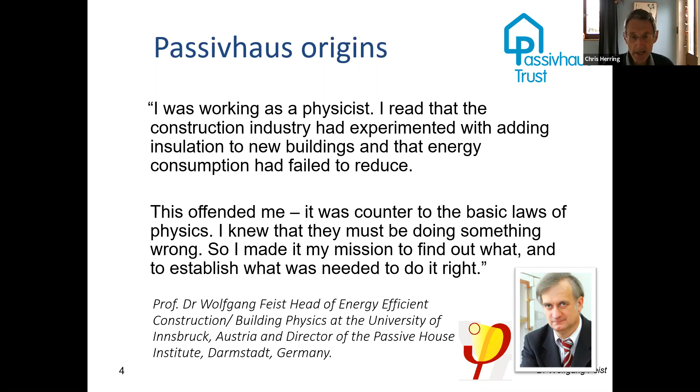And as a result, a group, Wolfgang and colleagues, developed this row of experimental houses just outside Frankfurt in a small town called Darmstadt. They got some local state funding to do this experimental work, and it was very experimental. It was based on very good building physics and on a scientific understanding of comfort, and we'll be talking about comfort a lot more during this session.

But it was experimental in the sense that if we build a passive house now, we've got a supply chain, we've got the products we need, then they had nothing that they needed. So they had to develop their own window ranges, their own ventilation systems. So extraordinarily experimental. What they found is that what they did worked. It's still working. It's been monitored extensively. There are 4 units here, and Wolfgang and his wife Witta live in one of them.

They recently did quite an extensive monitoring of the building and checking the wall structure and things like that to see if it was all working correctly and was still sound and everything was as they expected. So this was a success story, and out of this has grown the development of the passive house standard and methodology that we know today.

Now, that story about things not performing as expected that started Wolfgang off on this whole journey, if you like, is one that's repeated here in the UK. This is a piece of work done by Leeds Beckett University, which is quite near to me. I live in West Yorkshire. And the Centre for the Built Environment there have done a lot of work monitoring low energy buildings. They actually do what's called a co-heating test, where they physically test the building. They heat it up and check its thermal transmission.

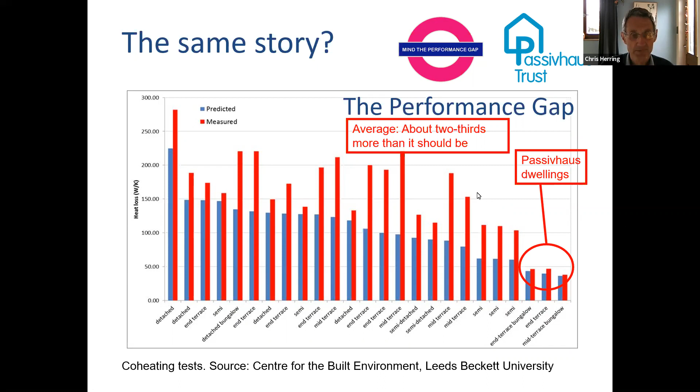So what is it? Well, it's basically an energy efficient building, a building that requires very little heat to maintain comfort within the building. And most of that heat will come from our own bodies, our household appliances, heat from the ventilation air that we recover, and some from the sun, not too much, otherwise we overheat. And there is a technical definition of the threshold of the amount of heat, but to put it simply, that's a very small amount of heat.

We do need heat in a passive house. It's not a zero energy building. That becomes disproportionately expensive to do. This is a sweet point where it requires a very small amount of energy, and it's a very cost-effective thing to do.

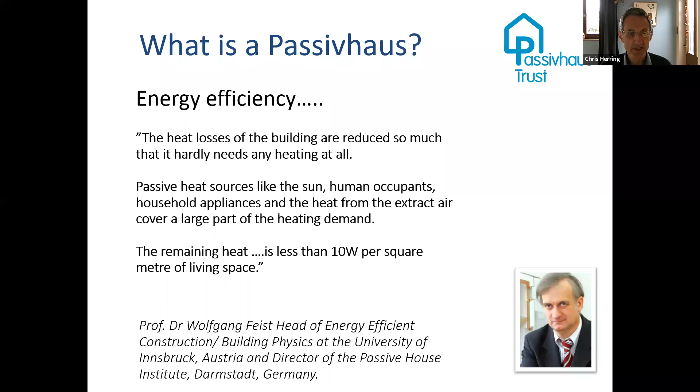But it's also about comfort, because when Wolfgang's colleagues were looking at the science, the building physics, they were also looking at all the research that has been done on how we make buildings comfortable. And the key feature of passive houses is that they're also very comfortable and very healthy. And I'm going to talk a bit more about that in a moment.

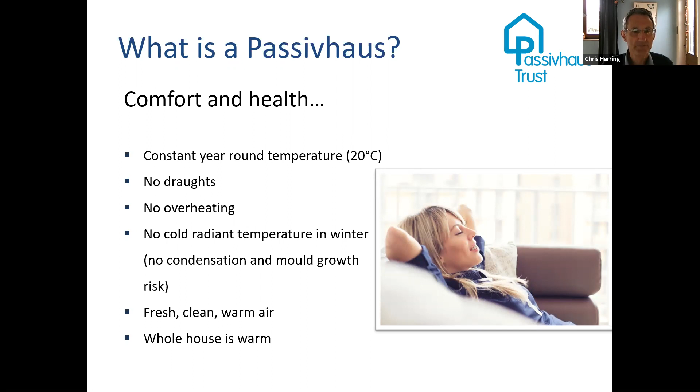There is a lot of science behind this, but you don't really need to know a lot of the science in order to be involved with passive house or even to be building passive house. We have a methodology that's supplied to us. We do need a certain understanding of building physics if we're actually a building professional, but there is a lot more behind this. The Passive House Institute is a scientific institute that supports this worldwide.

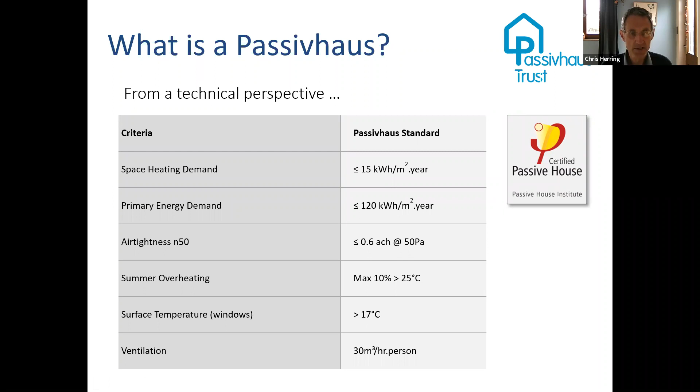So what have we got to do in principle? Well, it's kind of very simple. It's about very good building. It's about just building well, but also obviously we want to insulate, because we're not going to save energy and we're not going to make ourselves comfortable if we don't insulate. So high levels of insulation are obvious, but in with that, if we don't do other measures, then the insulation has little effect. So we need to get rid of our thermal bridges.

That means we need to particularly get rid of places where insulation thins down, or there's a reduction in insulation level, or where something goes through the insulation. And as we increase our insulation levels, those thermal bridges become proportionally much more significant. So we need to get rid of them, or if we can't get rid of them, we need to model them properly. If we're building insulated, we also need to build airtight. The two things go together.

If we imagine wearing a well-insulated jumper and you go out in the wind, it has very little effect. You need air tightness in conjunction with insulation, which is something that seems to be relatively poorly understood generally. We need our windows, which can be the weak point of the building, to be high performance. So in this climate zone, we'll need triple glazed windows. And then we need an effective ventilation system. And that would be mechanical ventilation with heat recovery. And I should be coming back to all of these more. So this is just an overview.

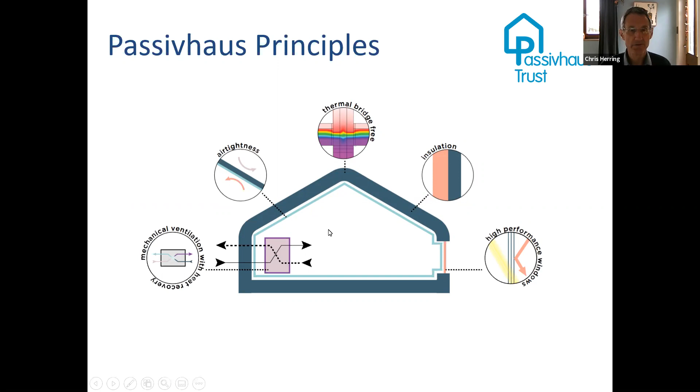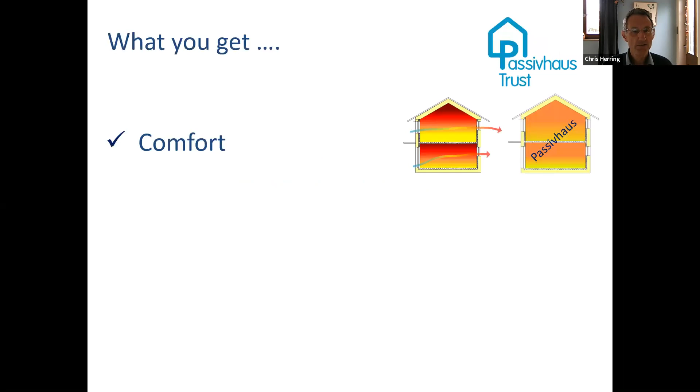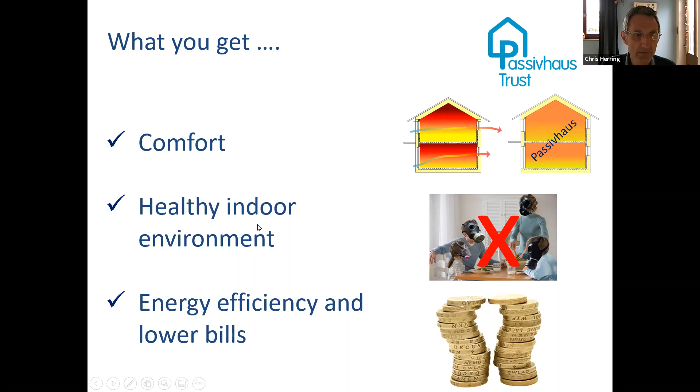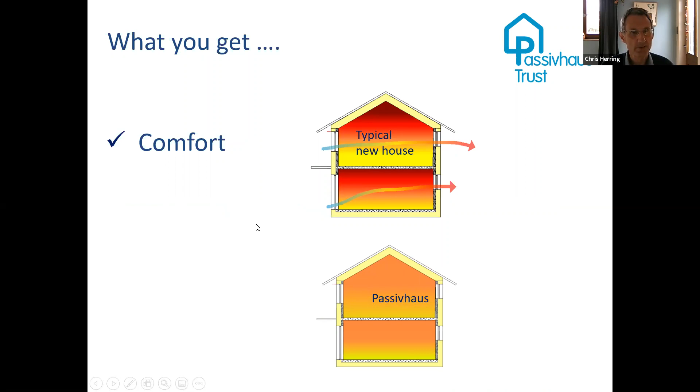Now, what do you get if you build to Passivhaus standard? What's the advantage for you of building to this standard if you decide to do it? So you get comfort, you get a healthy indoor environment, and you get energy efficiency, and of course lower bills. And we'll just unpick each of those and have a look a little bit more at what we mean and what the outcome is. So starting with comfort. Now, comfort, most people will say, well, my house is quite comfortable. I heat it in winter. What do you mean here? What does this comfort mean? Well, let's have a look at that.

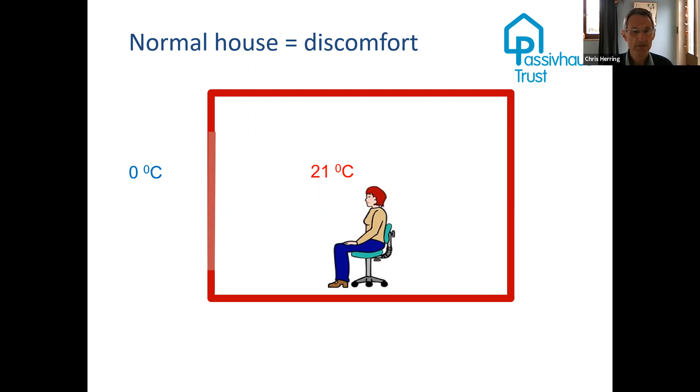So let's start and look at the sources of discomfort in conventional buildings. So the first thing we have in conventional buildings, including buildings built to the current building regulations, we have a lot of infiltration, a lot of drafts coming through the walls. Basically, we don't build very airtight, even in our new buildings, and of course our existing buildings are even worse. But a lot of air moving through the fabric of the building.

We'll generally have cold surfaces on our old buildings. Obviously, many of our walls are cold. Even in new buildings, our windows are likely to be fairly cold. They'll only be double glazed. So we've got cold surfaces radiating cold in effect towards us. And that affects our sense of comfort. If we've got cold surfaces, we will get cold downdrafts from that surface. The cold air will fall down, it will tend to cause a draft, and many of us will experience that as cold air moving around our feet. That increases our level of discomfort generally. Our feet are very sensitive to cold air movement.

And finally, we'll get ventilation drafts. So we're either ventilating in old buildings, probably just by allowing the air to move through the walls. In newer buildings, we put in trickle vents, holes in the windows to allow ventilation, and some extract fans in the kitchen and bathroom. That allows cold air to travel, and that cold air will be affecting you even if you're not aware of it.

So what do we do to then say, well, I'm comfortable? We increase the air temperature, and that will compensate. It does give us a level of comfort. It counteracts the discomfort of the fabric of the building, and that's what most of us mean when we say my house is fairly comfortable. But of course, the cost of that is much higher energy bills and much higher CO2 emissions.

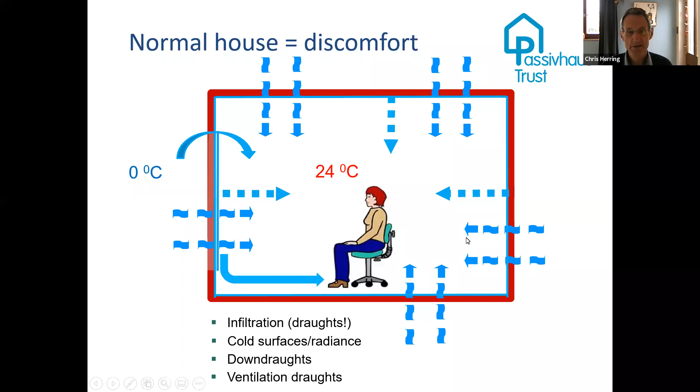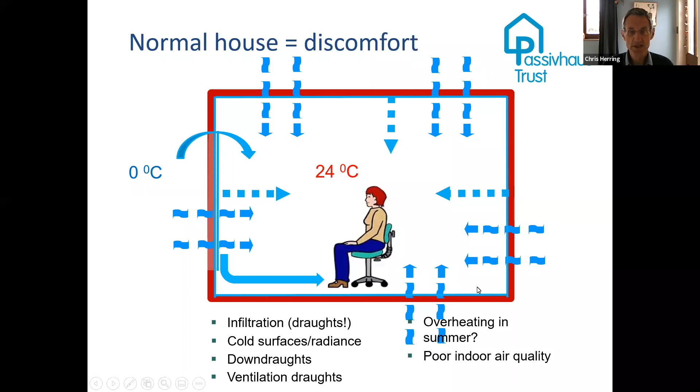The other things in terms of discomfort, slightly on the side, are that many newer buildings will overheat in summer and they'll be very uncomfortable. It's kind of an increasing phenomenon. And most modern buildings have quite poor indoor air quality. Older buildings tend to be better because they're so leaky that the air is moving through the fabric all the time.

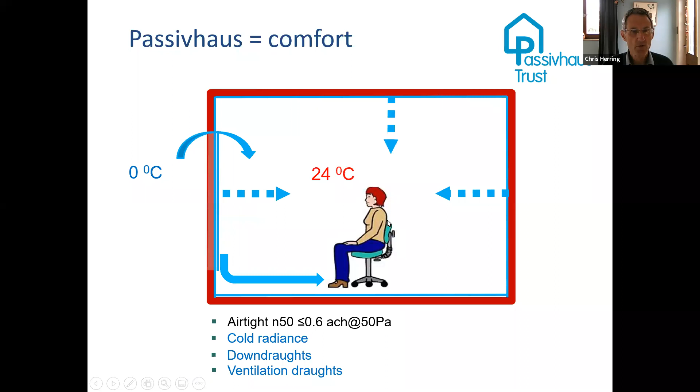So what do we do about that? How do we increase the comfort of the fabric of the building? Well, the first thing is get rid of all those drafts. So make the building really airtight. And there is some science behind this in terms of the level of airtightness, so that we don't experience any air movement through the fabric of the building and experience discomfort. Make sure that surfaces are warm. That means insulating properly to high levels all the way around, with no bridges, no bits where the insulation is broken.

We've got a cold bit. Make sure our windows are warm on the inside. So that means triple glazing in order to achieve a sufficiently high internal temperature. And then get rid of those ventilation drafts by pre-warming the air that comes in, which is what our mechanical ventilation with heat recovery does.

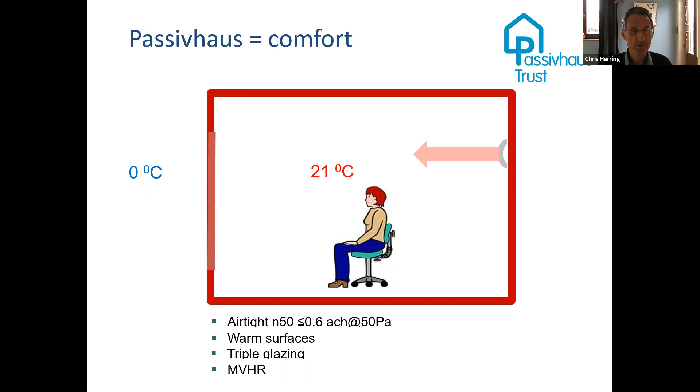That way we can then reduce our indoor air temperature and be comfortable, because the fabric of the building is actually inherently comfortable. In a passive house, we can also deal with the overheating, because we've got quite a good way of modeling the overheating as part of our methodology. And we end up with excellent indoor air quality, which I'm going to talk about in a moment. So we'll come to that.

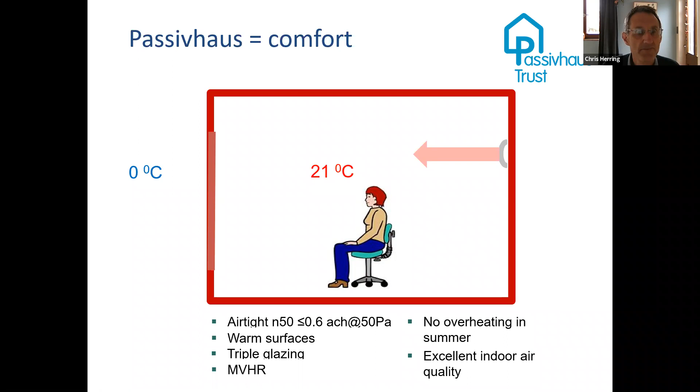So healthy indoor environment. This is the other thing you get. Now, if you talk to people who live in passive houses, they won't usually talk first about their energy bills. What they talk about is the comfort and the feeling of health, the feeling of a fresher indoor air quality. Very nice air quality, feeling very comfortable, no mold. They often talk about the quietness of living in a passive house, because it's very,

if air leakage can get into a building, the sound can get through the same gaps in effect. So an airtight building will be more acoustically insulated. Our windows are triple glazed, which improves that. We'll have no mold growth, because that's part of the methodology, showing that there is no mold growth.

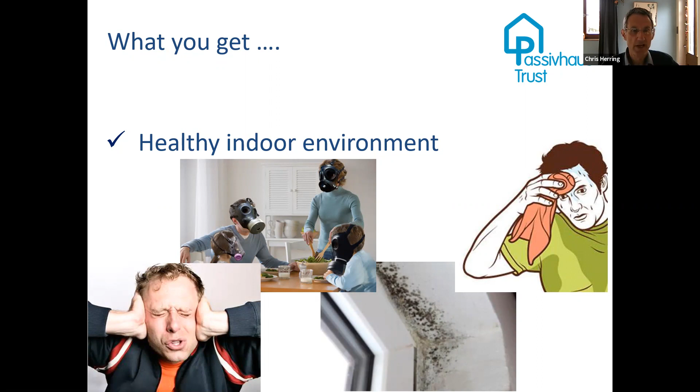We get very good indoor air quality, because our air is filtered as it's coming in. So we filter out pollens and particulates. And we'll have no summer overheating, or very limited summer overheating. So generally it's comfortable and healthy at all times. And as I say, this is what residents tend to talk about.

In terms of air quality, this is a complex subject, and there are many, many factors that lead to poor air quality, from volatile organic compounds from our furniture and carpets and paints, combustion products if we've got gas cooking or anything like that, mold growth, dust mites, etc. And all of those things need to be dealt with. They are dealt with in the building regulations in terms of ventilation levels, but it's not really very effective.

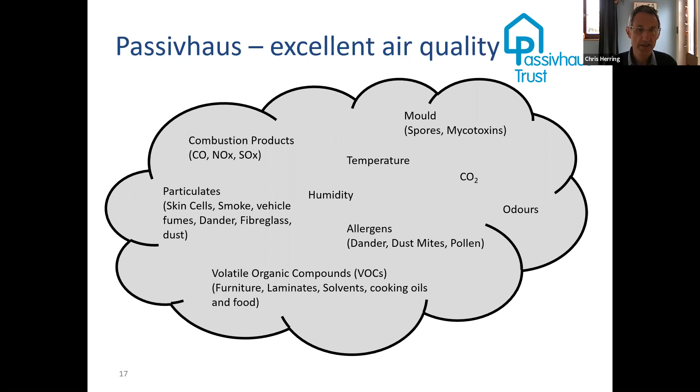Having very good ventilation deals with a lot of this. So with Passive House, we're optimally ventilating. Our mechanical ventilation is calculated carefully to give us optimal ventilation. What that also gives us is optimal humidity. And this is very important to our health, because generally most buildings in the UK are not too dry, they are too moist.

And my own house, which is an improved Victorian terrace house, in winter we're often at about 65% relative humidity, which is not terribly healthy. It begins to get towards a situation where we'll get more bacterial growth, dust mites are more likely to develop. There are a number of factors that mean that we're less healthy.

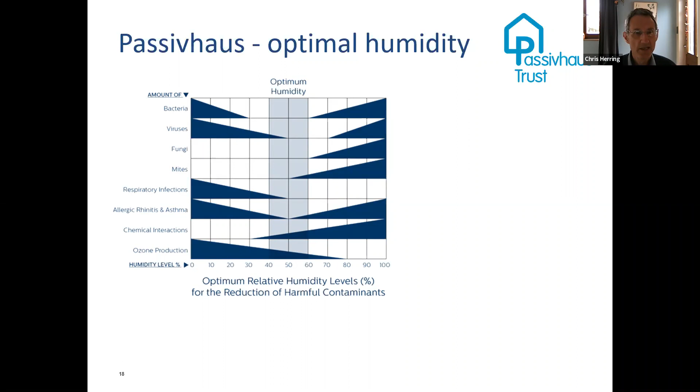The optimal humidity is in this band shown here, about 40 to 60%. And my own experience and the experience of most people is that in the UK with MVHR, we're typically running between 40 and 50%. So absolutely in that optimal band for humidity. And this is key. It's key in terms of mold growth, although we wouldn't expect mold growth in a passive house because every surface is warm. There's no way for the moisture to condense.

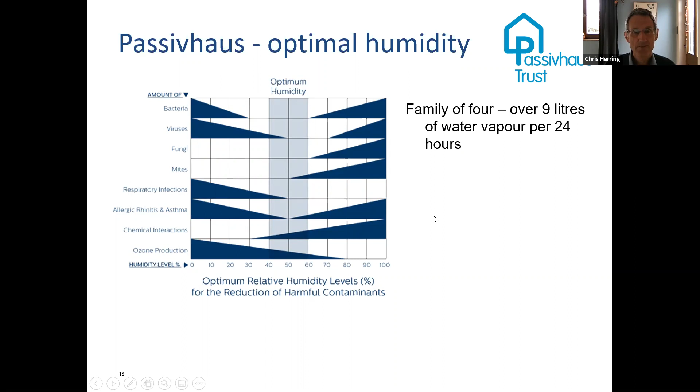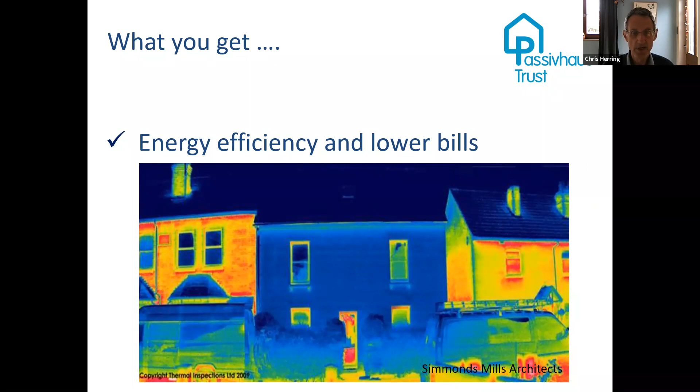So the passive house retrofit, built to the passive house standard, there is very little heat getting out, and therefore the walls are cold and showing blue, whereas the houses adjacent, there's a lot of heat leakage, and of course they're showing much warmer colours. So you can see the effect of building to this standard. And you do get much lower bills.

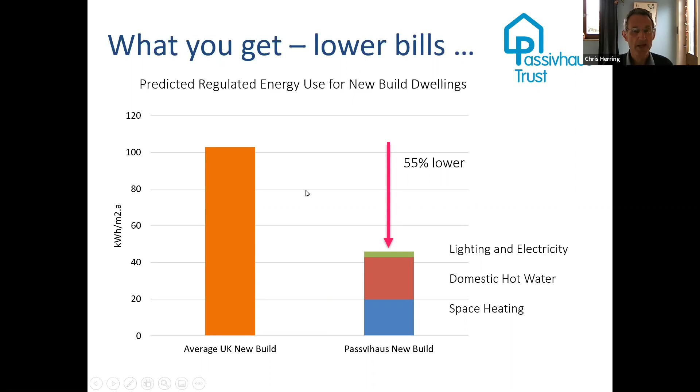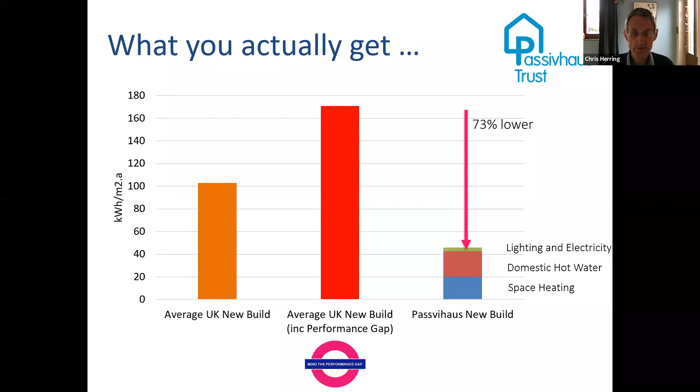However, if you remember the performance gap, theory and practice are not the same. And the reality, if you account for the performance gap with new build, is that we're around about 73, 75% lower in terms of our regulated energy use. So a massive saving. And residents of passive houses will talk about their very, very low energy bills.

So what do we have to do? What actually does this look like? And I'm going to start from the beginning. So I could start with the insulation, but actually I'm going to start with orientation and then form, because we need to start at the beginning of the process.

And the first thing when we're planning our building is just thinking about the orientation and being aware that a south-facing orientation is likely to be more efficient than a north-facing orientation, because obviously we're gaining some of that free energy from the sun. We don't want too much, otherwise we overheat. So that's something we calculate in our methodology, but it's important to be aware of, and it highlights that we need to start this process from the very beginning, from where we first conceive of our building, not bolt it on later.

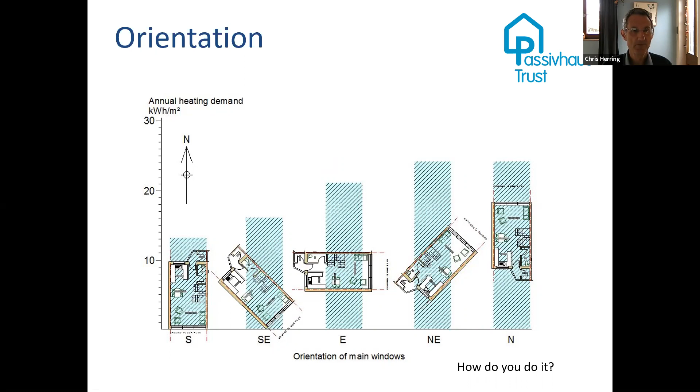The same with the form factor. This is something that people find quite difficult to get their heads around at times, but a simple form, with no bits sticking out, if you like, or cross shapes or L shapes, will have the least surface area in relation to the volume and floor area of the building. That's called the form factor. If we make a larger surface area, we're going to need more insulation for the same amount of heat loss. So we need to keep simple form. We need to avoid complex forms.

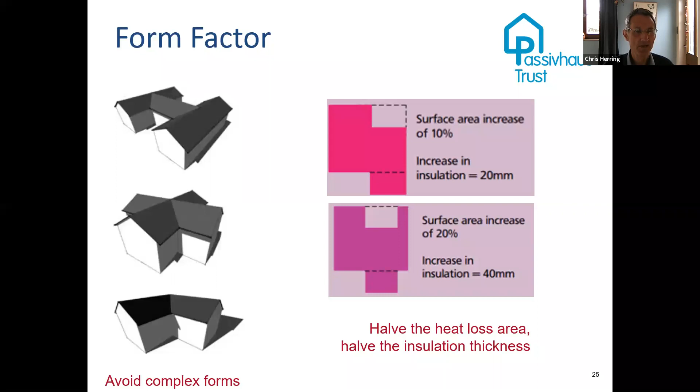And again, this comes right at the beginning of the process. We can be thinking about this. It doesn't restrict our architecture. It just means that we need good architects thinking about very good design. We don't worry about having to have roofs to keep the rain out. It's just a fact of life. It's just the same thing. This is just simple numbers.

Now, coming to the things that seem more obvious, lots of insulation, of course. Typically in the UK, we might be looking at walls with, if we're talking about fibrous insulation, about 300 millimeters, depending where we are in the country. Less if we're looking at polyurethane insulation or something like that. The Passivhaus standard doesn't tell us how to build. You can build timber frame, cavity wall, ICF, whatever. It's neutral to materials. That doesn't mean to say that materials don't matter, but they're not included in the standard.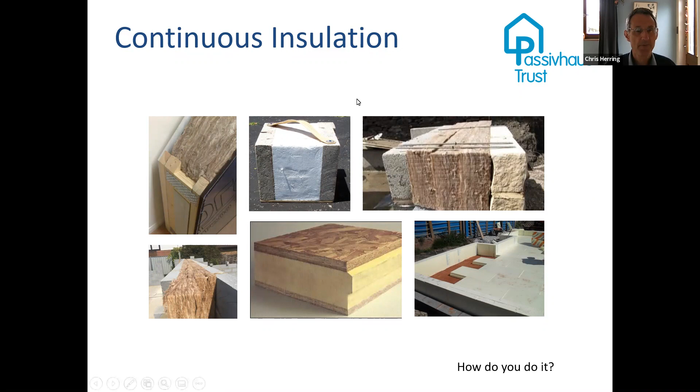As I said, thermal bridges are very important. We need to either eliminate them or model them. And we have to actually model them in computer software if we think we've got thermal bridges anywhere.

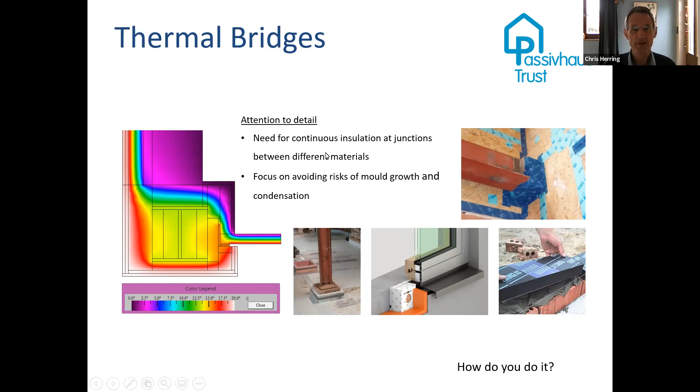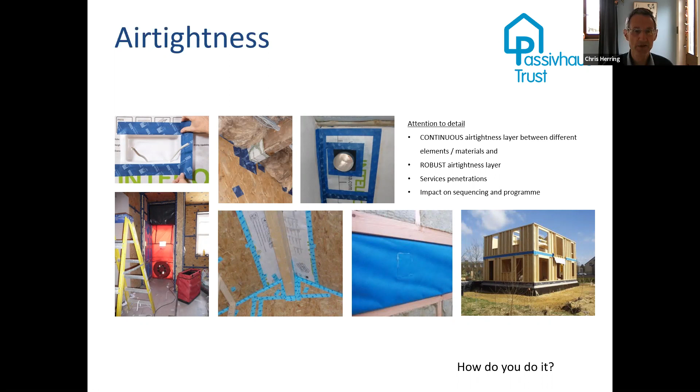We have to deal with air tightness, and we'll typically be using specialist air tightness tapes to do this. And while this might seem very onerous at first look, if you're not used to this, it becomes second nature to builders once they get used to it. Our own team in my own company, they can't not do this. They just do it automatically now. And a lot of the detailing, if you get the detailing right, it's actually quite straightforward.

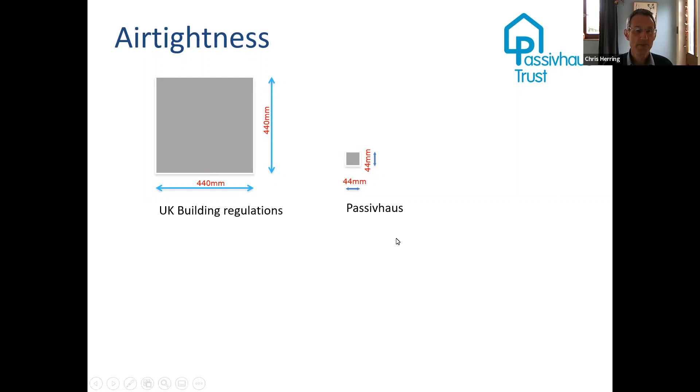And this is an example of what we mean by the air tightness. If we summed up all the leakage in a UK building regulations compliant building, it would be the equivalent of a hole in the wall about this size, about 440 millimeters square. And in a Passivhaus, it would be this sort of size, about 44 millimeters square, very roughly. And if we compare what that actually looks like, it's the difference between a hole-in-the-wall machine and a credit card, which perhaps makes the point quite well.

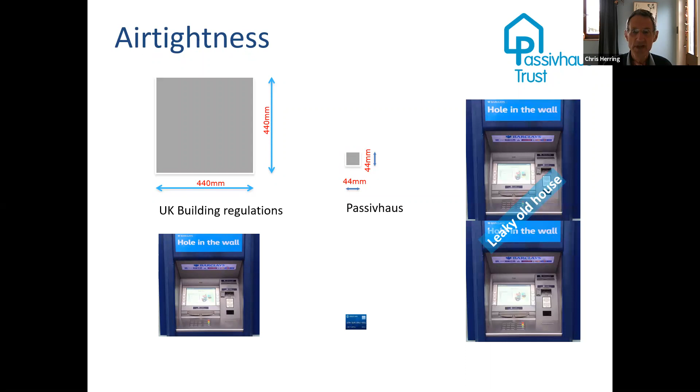We're looking at very high levels of air tightness, one of the challenges. But again, once you become used to building like this, it isn't that difficult. And if we look at our leaky old houses that many of us live in, we've probably got the equivalent of at least 2 hole-in-the-wall machines leaking through the walls at all times.

And then we've got the MVHR system. People are quite nervous about this. They think it's something very difficult. It's actually a very simple thing in many ways, much simpler technically than a gas boiler. But what it's doing is recovering heat, the outgoing heat, and of course delivering the ventilation exactly as we want it to be, rather than a very hit and miss approach with trickle vents and extract fans that don't really work very well. This gives us optimal ventilation, and it's why so many people talk about the air quality in Passivhaus as being so good.

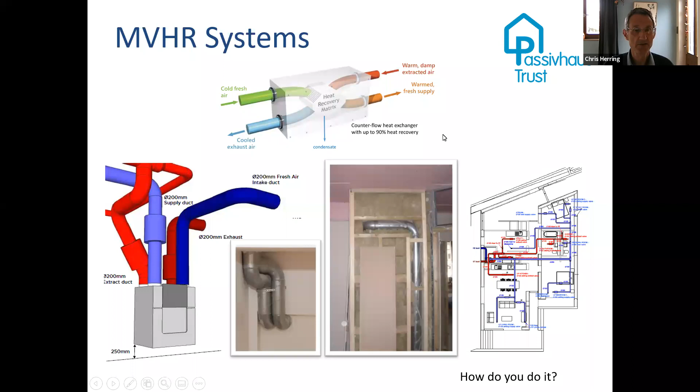We do need triple glazed windows, and there are plenty now on offer. We also need to detail them well, and in Paul Smith's presentation later, he'll be looking at this in more detail. We need to ensure that the thermal bridge of the installation, how the window is installed in the insulation, is well detailed.

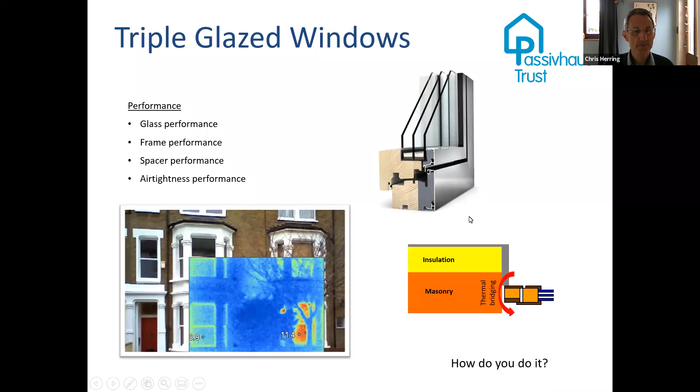And then the other plank of this is the accurate methodology. We've got to know what we're building, and this is what Passivhaus Planning Package gives us. Now, we don't have this with our UK methodology. Our Standard Assessment Procedure doesn't give us an accurate prediction of the performance of the building. What it does is tell us whether the building will comply with building regulations, which is not the same thing. So Passivhaus Planning Package tells us how your building will perform.

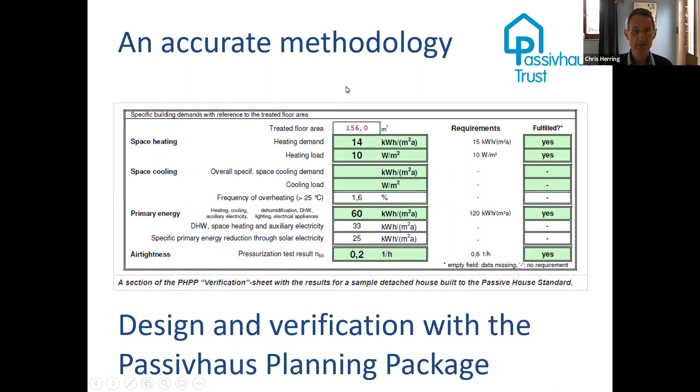And then finally, quality assurance. If we buy anything really, we expect it to be quality assured. And yet, strangely, when we build new houses, we don't expect any high level of quality assurance. There's no real quality mark. We have a basic check with building regulations, building control, but it's very modest. And fundamentally, there isn't really a quality assurance system. Passivhaus says you've got to build well. You've got to build what you've designed, and we're going to check it. So there's a real value in certification at all levels.

So how much does it cost? The question that always comes up. Well, the answer to that is a little bit how long's a piece of string, if you like. It can be 25% more, it's been known to be; it can be down to a few percent more. And the key here, as I've started to say in this presentation, is that a lot of the costs that people do incur are because they don't start with Passivhaus at the beginning. They build in problems that they've then got to sort out, and it's very expensive. So they build in a complex form that's difficult to work around. They build in details that are very difficult to make airtight. Then there's a lot of cost in that.

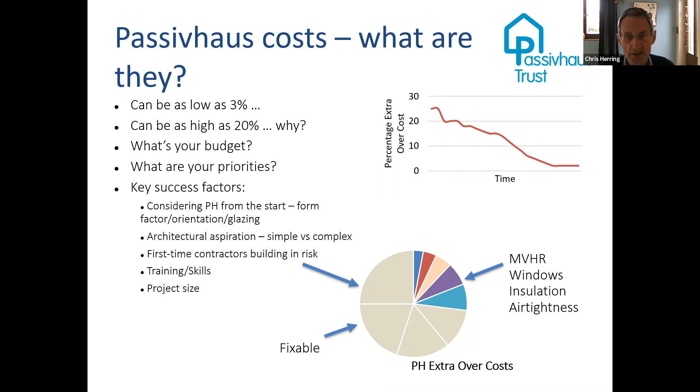But if we've got an experienced team doing this, then all of that should be eliminated. Then there are some quite modest costs. We need triple glazed windows. We need an MVHR system. We need a bit of extra insulation, a bit of extra airtightness. Work done last year by the Passivhaus Trust showed that typically that could be around 8% for best practice. And in the future, as Passivhaus becomes more dominant in the market, it's probably going to drop to around 4%. So if you use an experienced design and construction team, you could expect 5 to 10% at the moment, might be a reasonable guess. If you don't start at the beginning, if you don't optimize what you're doing, it could be a lot more.

And please remember that standards are going to increase this decade. There's no doubt. The projection is for the Future Homes Standard in 2025. Nobody knows what it's going to be, but basically the government has said it's going to be 75 to 80% less CO2 emissions, which is around about Passivhaus. So the cost of a new build by 2025 or thereabouts is going to have gone up significantly, and a Passivhaus is going to be very similar. So we might right now be building quite low standards, but they're bound to improve if the government is going to meet its legal targets for climate change. We don't know what's happening in 2020. It was out to consultation, we're waiting for the government to tell us, but we think it won't be particularly good. And projecting further on, standards are only likely to tighten further.

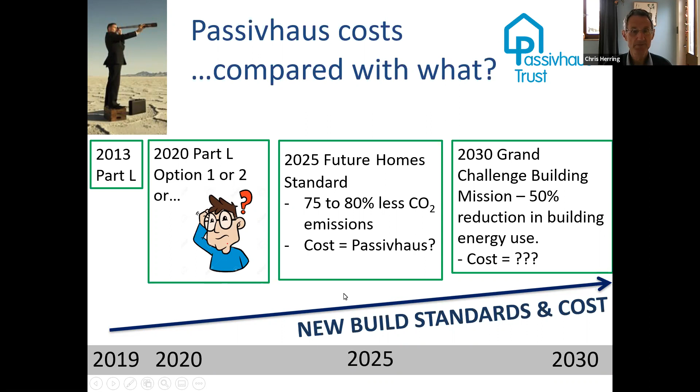So where is Passivhaus in the UK today? Well, the first certified units were built in 2009, two of them over in West Wales. But by 2010, there were quite a few pioneering projects on the ground and completed. And 2010 was when we set up the Trust, as we could see that Passivhaus was beginning to get some traction and interest in the UK. We set the Trust up really to support and promote Passivhaus, as we felt it was very important as a sort of guiding light to the industry, if you like.

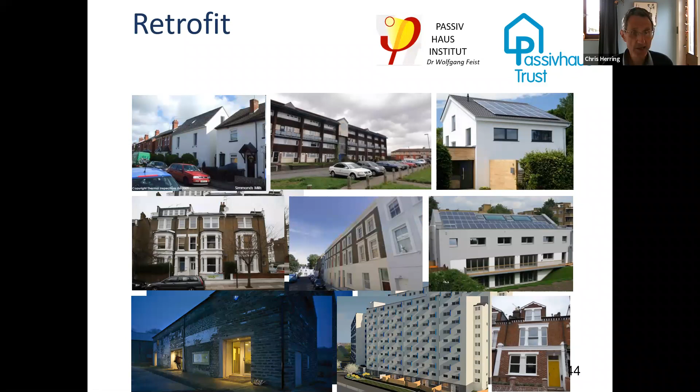So quite a lot of social housing built to the standard, and schools and offices built to the standard. Again, a few examples here. Quite a few schools now built to the standard with enormous benefits for the school children, actually. We've got retrofit, some deep retrofit done to the standard, and we've also got some large-scale projects now in the UK, including the project I mentioned at the beginning, the Goldsmith Street, 105 new Passivhaus homes.

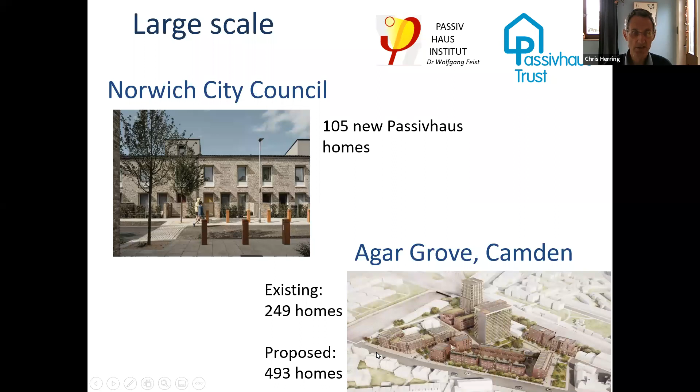Norwich has been doing quite a lot of Passivhaus and is committed to doing more. Camden Council are doing a lot. They've got 250 homes at the moment, and they've got another sort of about 500 proposed. And interestingly, Exeter City Council have done a lot. They will only build Passivhaus for anything they develop. All of their new housing is Passivhaus.

And this new leisure centre and transport interchange is being built. This is groundbreaking, really. This is currently under construction and it's being built to the Passivhaus standard. So there is a lot of interest. However, we've got to say that it's a tiny part of the construction market at the moment. But I think its importance is it acts as a beacon. It shows what you can do, and it shows where we'll need to go in the future, and pretty near

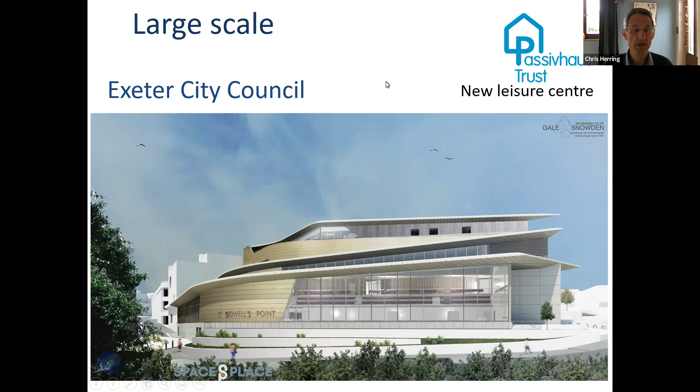future in reality. This is a graph from last year from the Trust, the number of certified units and the number under development. That number has gone up significantly now, and I should update this slide really.

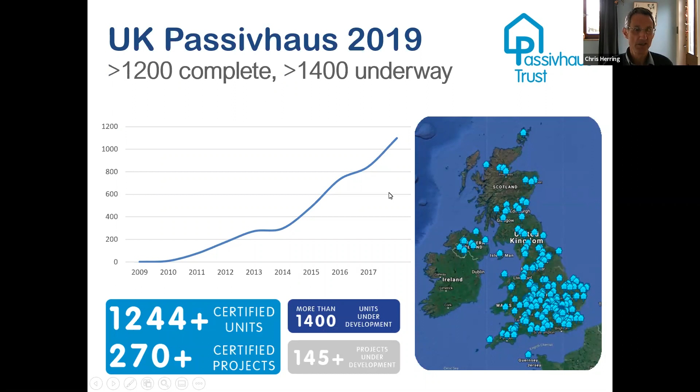I get approached a lot, and a lot of us do, about, well, we kind of want to take some of these lessons, we want to use the principles, but we don't want to go all the way. So my question is always, what would you leave out in all of this? So would you leave out the accurate modelling, which is absolutely the core of this? Without it, you are spending money without having any idea what the effect is going to be. And that seems like a lot of wasted effort to me.

You certainly could leave out the quality assurance and certification, and you might, if you've got an experienced team throughout who you know can do this, that's fine. But if you don't, how do you know you'll get what you think you're getting? Certification gives you that assurance. It probably gives you value into the future as well, because you've got a certified passive house with a plaque on the wall that in the future will add value, I suspect.

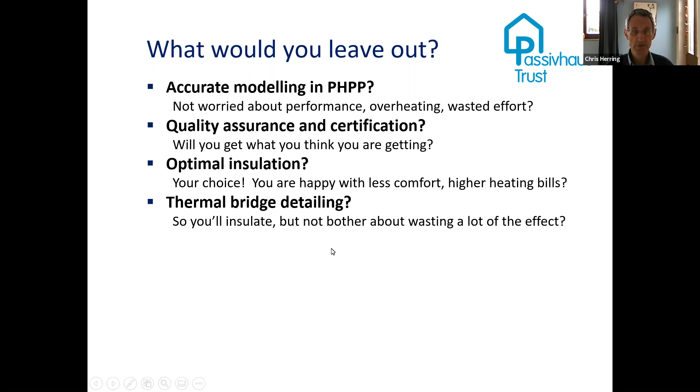Would you leave out the insulation? Well, I don't think you'd be listening to this if you thought you would, so I won't address that. But if you're going to insulate, then not to do the detailing on thermal bridging makes no sense at all, because you're just wasting your insulation. And again, the same with airtightness. If you're happy to have an inefficient building, to waste a lot of the effect of your insulation and to have drafts, then yes, don't do the airtightness, but it doesn't make a lot of sense.

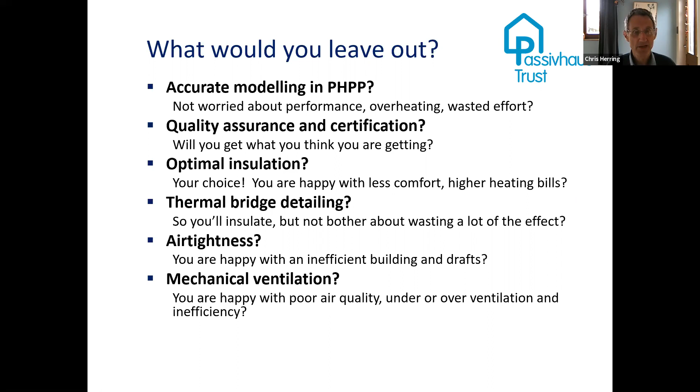And once you start improving your airtightness, it's then quite easy to get down to the stringent levels of passive house. And finally, mechanical ventilation. It's the thing that everybody talks about when they're in a passive house, the air quality, the comfort. Many people choose mechanical ventilation with heat recovery, even if they don't live in a particularly efficient building, because the air quality is so much better. And of course, it increases the efficiency of the building as well.

So finally, just thinking about what your next steps might be, if after today or after learning more about passive house, you decide to go further with this. I think the first thing is very much understanding what we're talking about, understanding what passive house is. Get informed, start today with the information here today.

So you're either a knowledgeable client, or if you're a professional, even if you're not doing the technical side of it, that you really understand what this is about. So you can help your clients move down this road, perhaps with the help of a passive house consultant to do the technical stuff, but that you really understand what this is all about.

Decide. Passive house principles isn't passive house. Is this aspirational? Does it make sense to you? If so, that's a decision you need to make. Start at the beginning. As I've said all along, you need to start at the very beginning of the project. Bolting passive house on later can be very expensive, very difficult. It's possible, but it makes it much more difficult to achieve what you want to achieve.